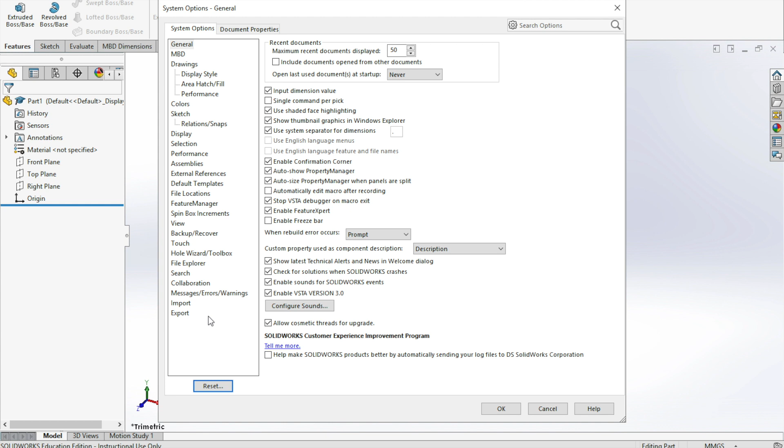We go with parts and open SolidWorks, and we're going to make sure that the units are mmgs. Technically it should ask about the units right now, but if not, we can go to tools and options and check it there. And we should find the unit system. If I can find it, that would be perfect, but it's not going to happen very fast. Document properties here, of course, and units, it's mmgs, millimeter gram per second. Now that we have that,

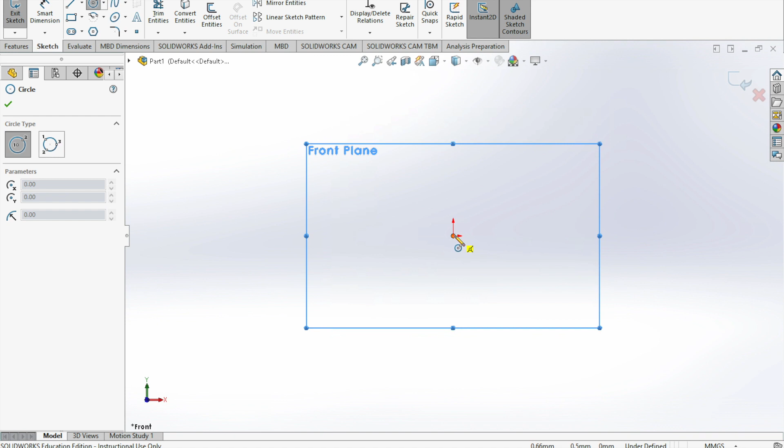We go to the front plane and start from there. We create a circle there, and we put it at the center, and the circle diameter is going to be, the radius is going to be 16 millimeters, so the diameter is 32.

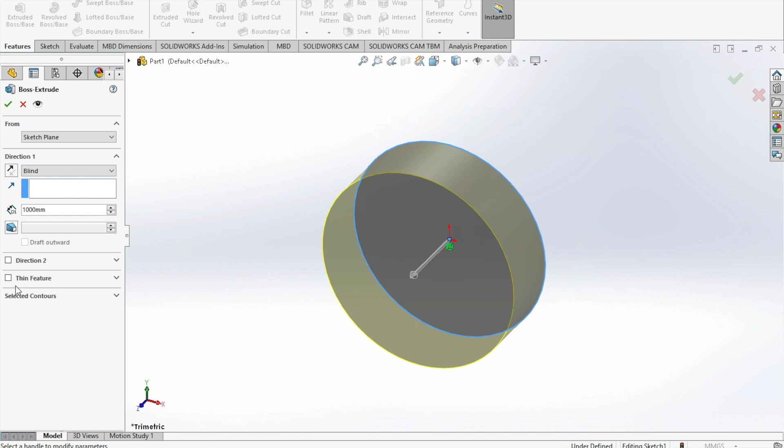Now from the features, we're going to extrude this circle for 1000 millimeters in direction 1. Make sure to check thin feature, and we're going to cap end to 10 millimeter, that's enough. And then check.

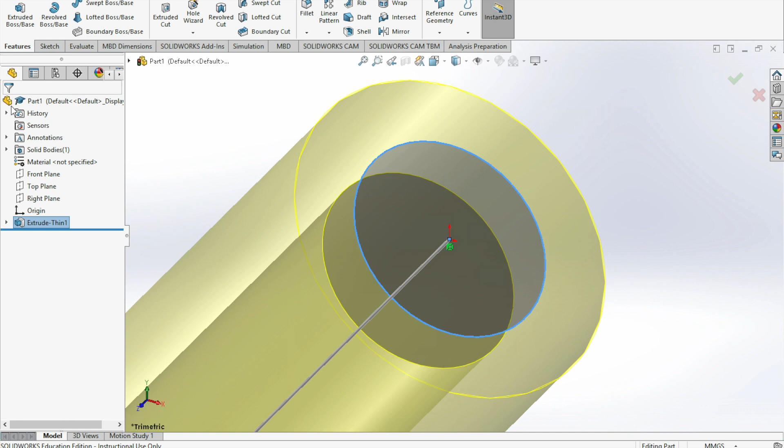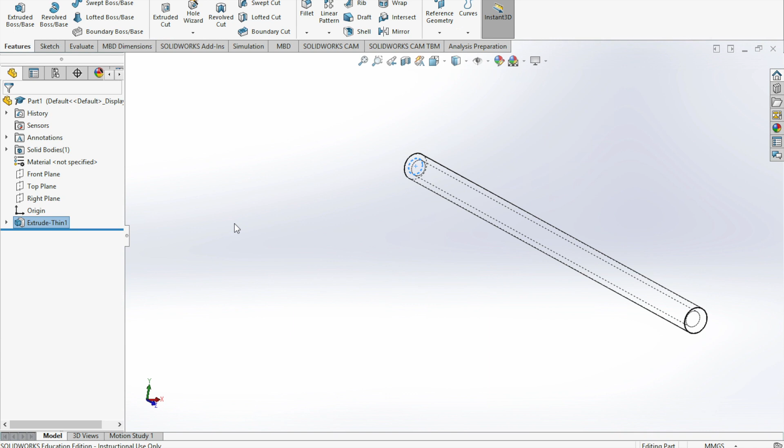Now should have this tube, this shell, better to say. Now we go to the left view, and then select the top plane and insert a new reference plane here with an offset distance of 26 millimeters. Reference geometry, insert reference geometry plane, and we already have this offset distance of 26 millimeter here, and hit OK.

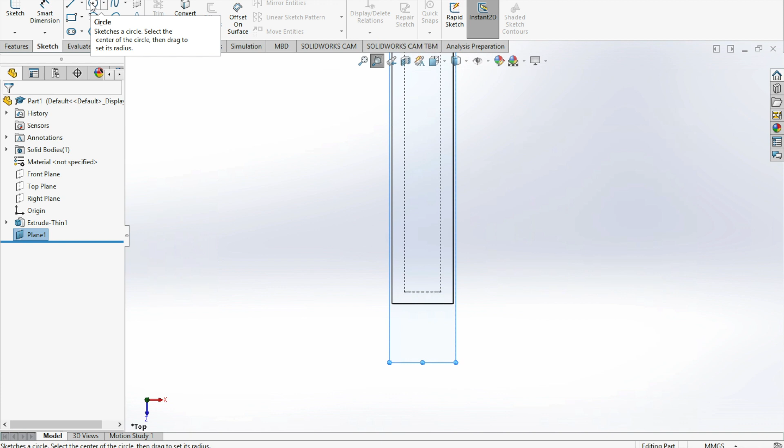Now we go to the view orientation, we go to the top plane, now we zoom towards the bottom of the plane, and then select this plane 1 that we just created. Now we can sketch the circle here. To avoid any constraint, I can draw a circle outside of the geometry and then edit the properties here. So I would put 0, minus 974 millimeters for X and Y. And then for the radius, I'm going to put 16 millimeters.

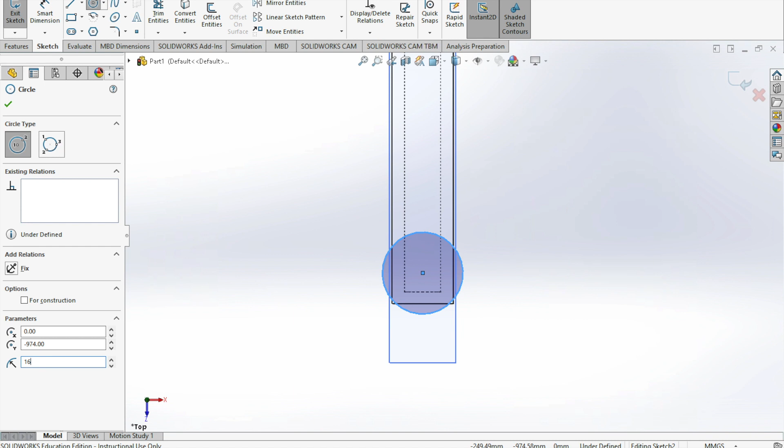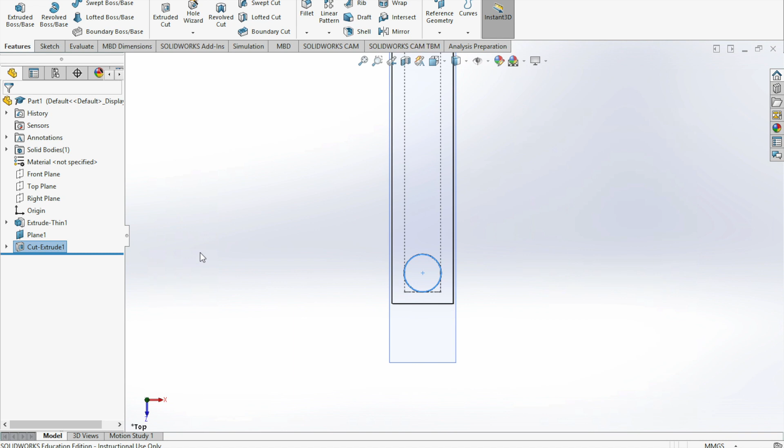And then check. For the feature, I do extruded cut. And then the depth is going to be 26 millimeters. Pay attention, 16 millimeters is for the radius of the shell itself, and 10 millimeters is extra to have the tube coming out of the shell. And that's it. Here's how it's going to look like. So we have a cut made here into the tube.

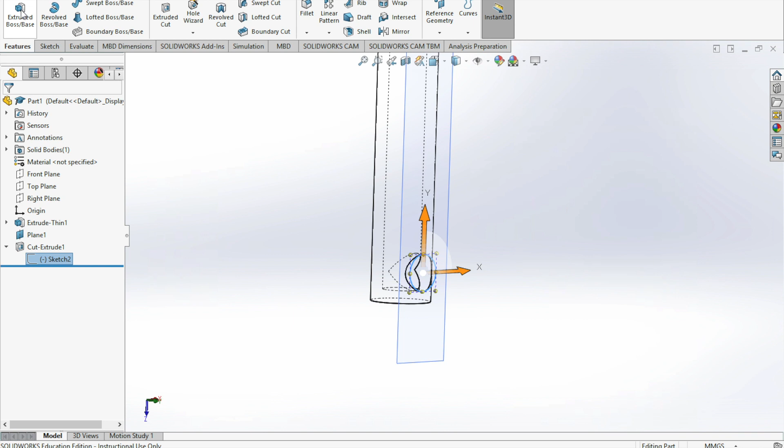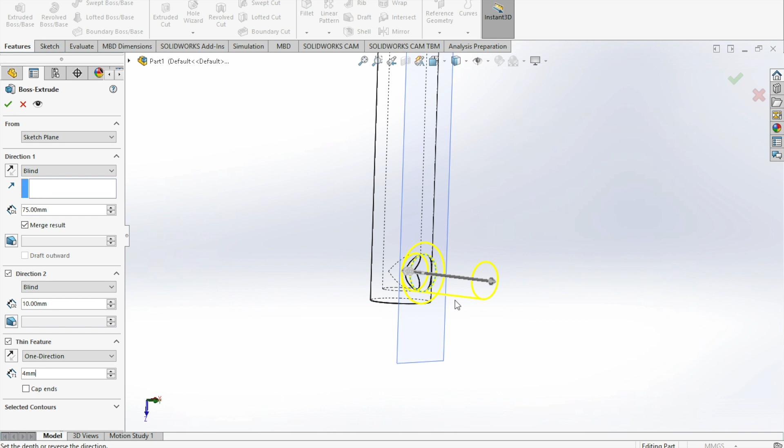Now again, we still have some work to do with this sketch that we created, this circle, right? So we're going to do extrude boss base, and then the depth is 75 millimeters in direction 1. In direction 2, it's going to be 10 millimeters. And we select a thin feature of 4 millimeters. We don't need to cap the ends here. Again, you can see here how it's going to extend, so it's going to fill that area and come out also.

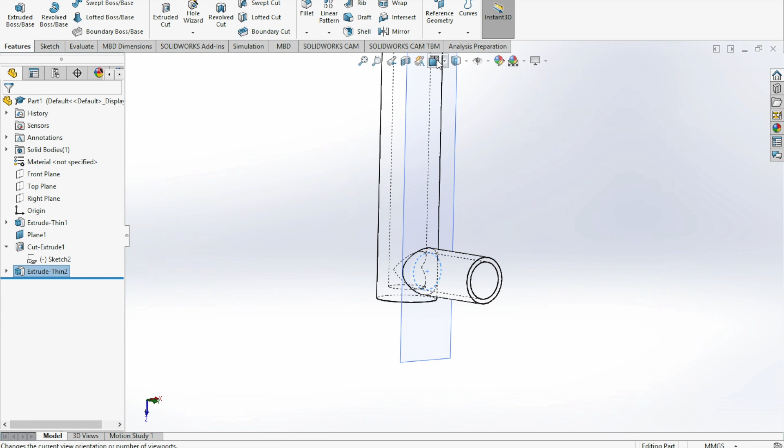Here we go. As you can see, it's now completely connected. We have a way to go in, for the fluid to go in and continue its path in the shell. Now again, we go to this left view. We select the top plane and define another geometry. So pay attention, we created this plane here.

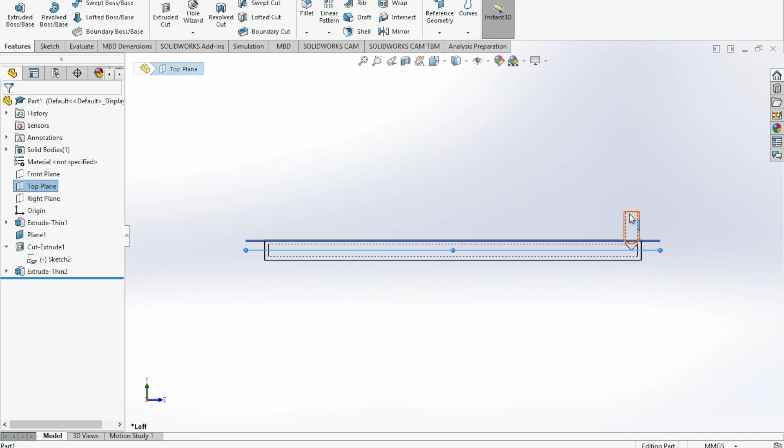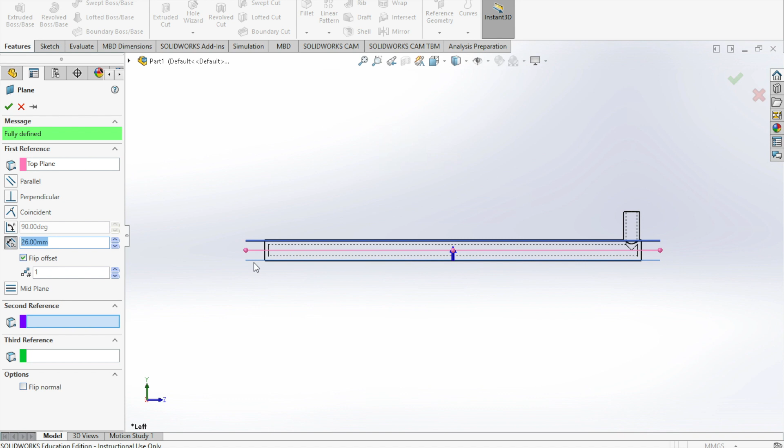You can see this plane 1. We created a circle here, and first we made a cut, then we made an addition here to join. Now we're going to do the same thing on the bottom plane here. So here now I insert a plane, a reference plane. Again, 26 millimeters, this time flip offset. Now you can see we have this new plane at the bottom surface. It's a circle, so calling it bottom is kind of weird, but you know what we are talking about. And then we check. In this plane now we can select the bottom view.

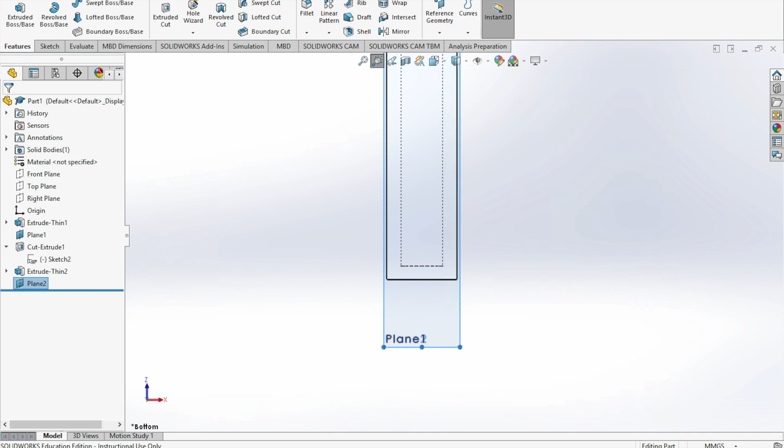Now in this plane that we just created, we zoom in again to this area, and we kind of repeat the same thing. In this plane, we create a circle. Again, to avoid any constraint, I go off the geometry, and it's going to be 0, minus 26 millimeters, and 16 millimeters. Approve this.

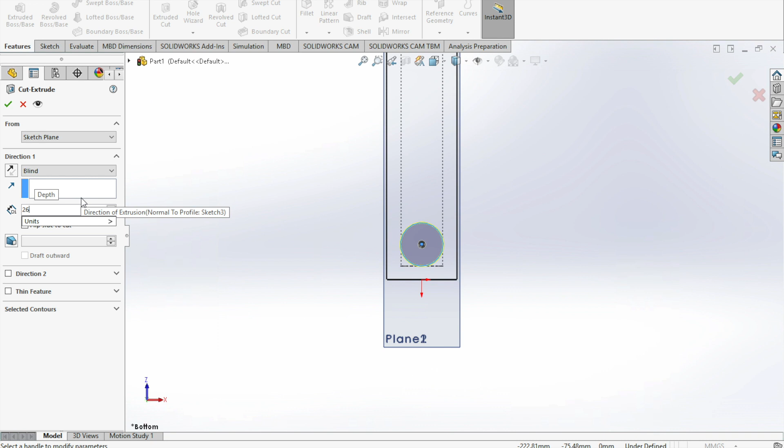Extrude cut. The depth is supposed to be 26 millimeters. And if I rotate this, what you notice is it's coming out. The direction of the normal direction of each plane is important. So what you do is do reverse. So now it cuts through. Now we are sure it cuts through the shell.

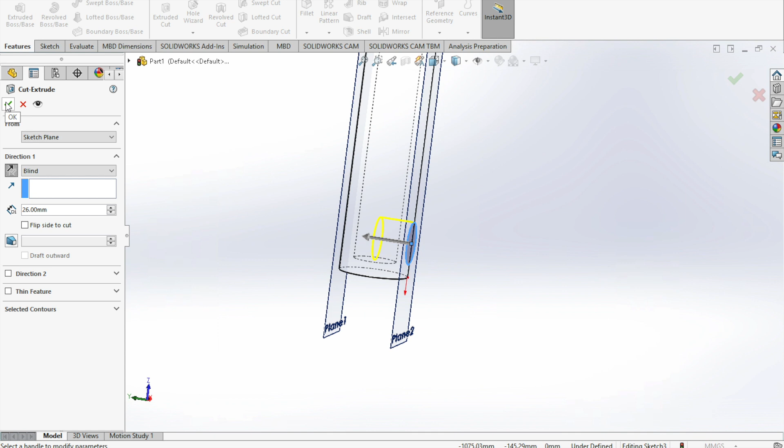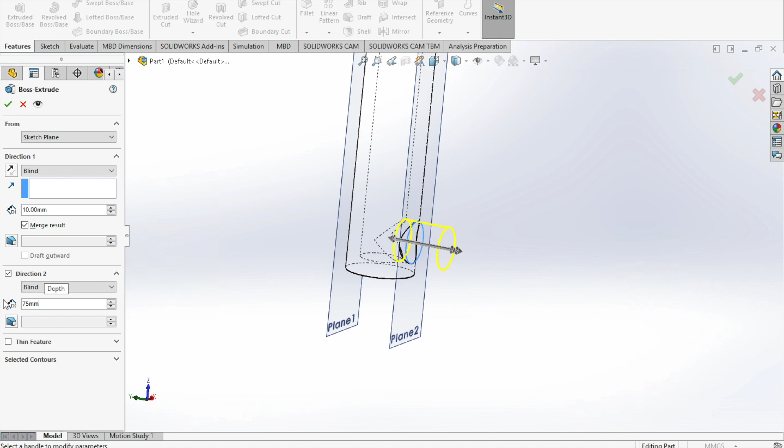We hit OK. Now again, we select this circle that we just created, and we do extrude boss base. Again, 10 millimeters in direction 1. As you notice, it's going to change. Now in direction 2, it's going to be 26 millimeters by default, because we did 26 before. 75 millimeter is good. And again, it should have a thin feature of 4 millimeter. We should not cap the ends.

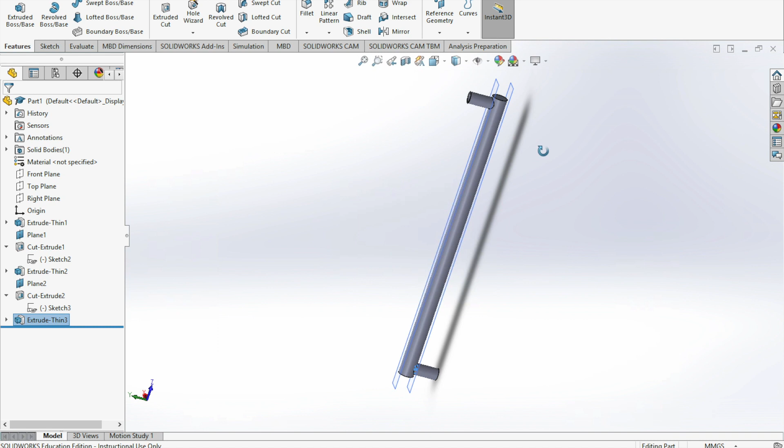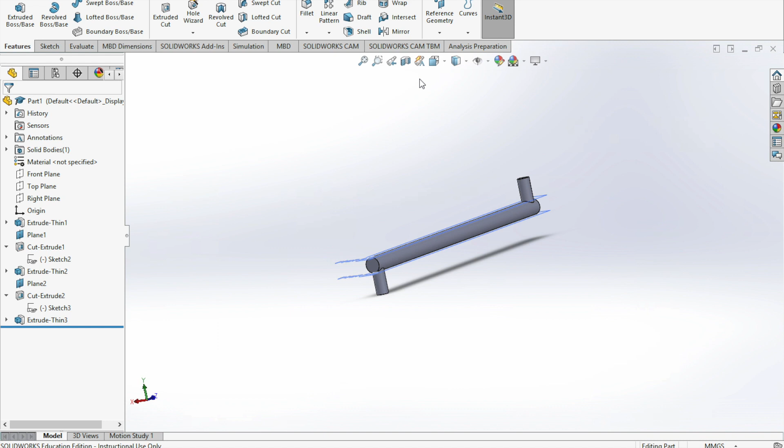And here we go. Now what we have is essentially, we do this. We have a shell that has the tubes coming in and out of it. Now we need to drill a tube in it. So essentially this is forming the whole shell, these 3 tubes. Now we're going to run a central tube in this. So what we are going to do is just go to the back plane and start creating that. In the back plane, we select the front plane and create a circle there.

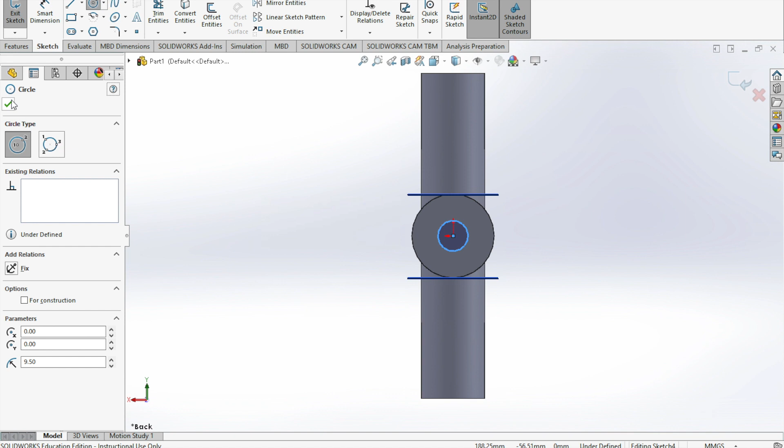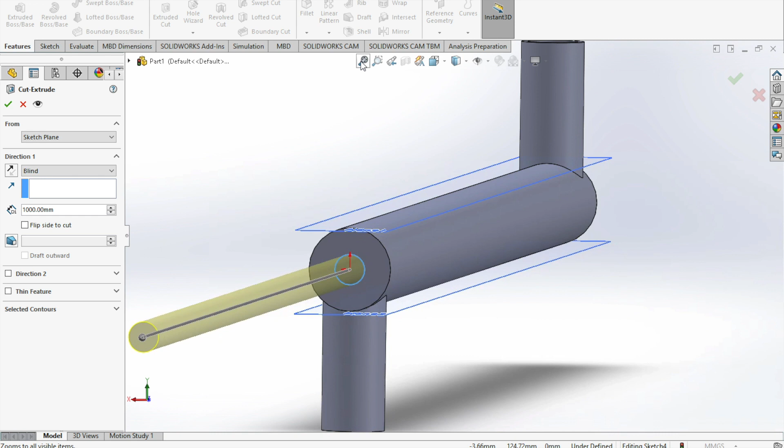And the coordinates are going to be 0, 0, 9.5 millimeters. Check. Now we have the sketch 4 here appearing. Now we do extrude cut, and we put the depth at 1000 millimeters here. And you may notice that we have this weird length coming out, so we should put reverse direction and hit OK.

Now again, opening this sketch that we just created, the circle. What happened just before going forward, I'm going to show you. So this is what's happening. Essentially, it cut the caps of the shell only without creating the tube inside of it. Now we're going to do the creation of the tube.

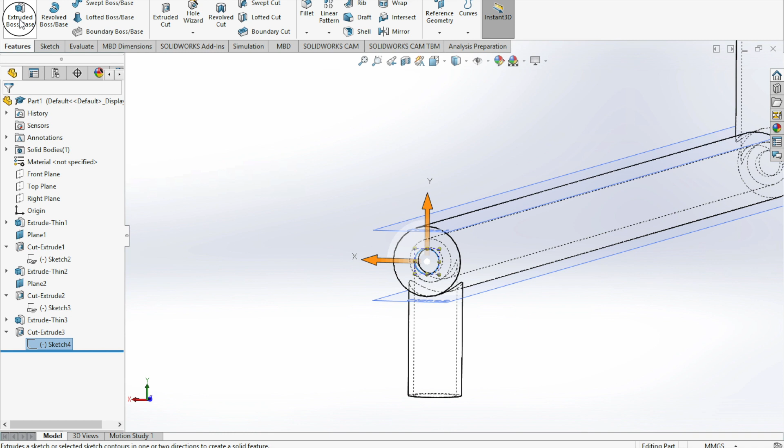So we do this. We do the extruded boss base, and the length this time is going to be 1026 millimeters. And direction 2, it's going to be 26 millimeters. And the thin feature, we're going to add 2 millimeters. And hit OK.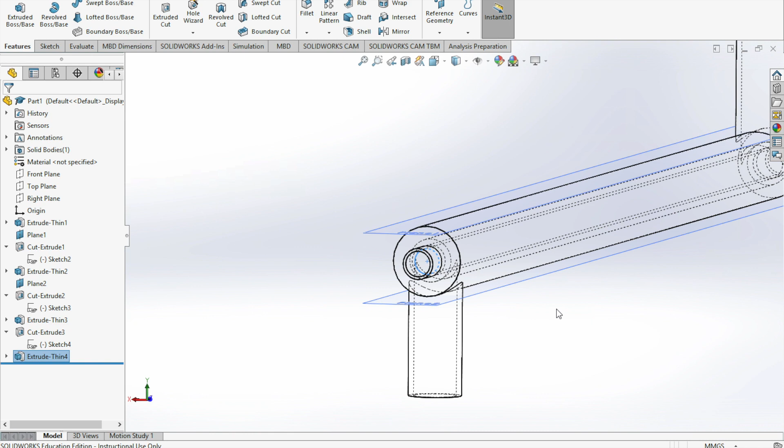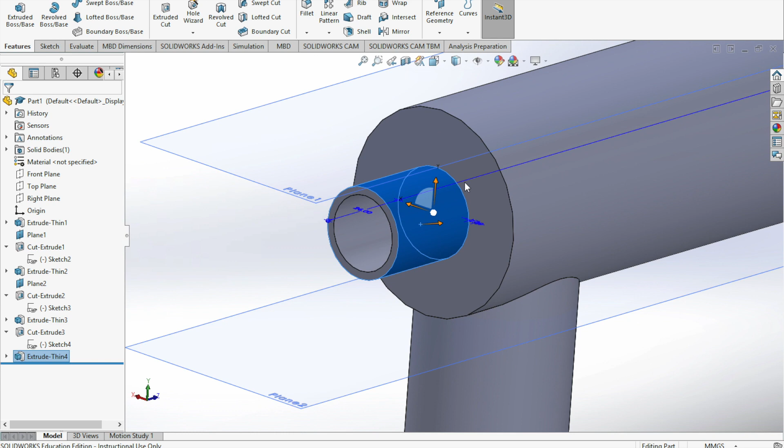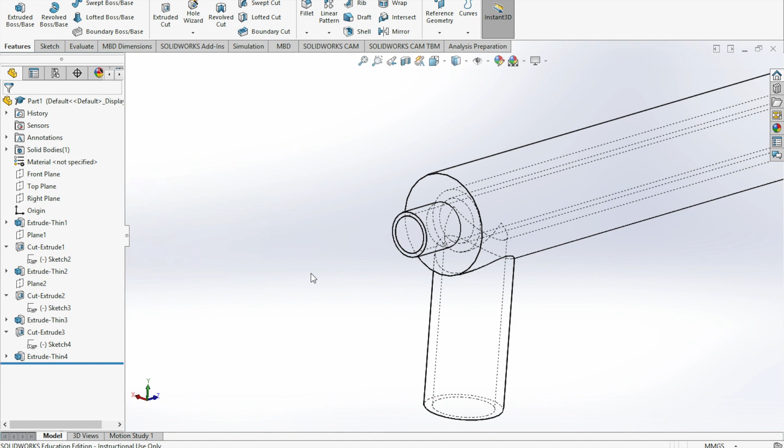And now you can see we have extensions of the tube. Now what we can do here is just get rid of these two planes, hide them, and we have a clean view of what we created.

What you need to do is just save before we lose anything. So I created this folder here.